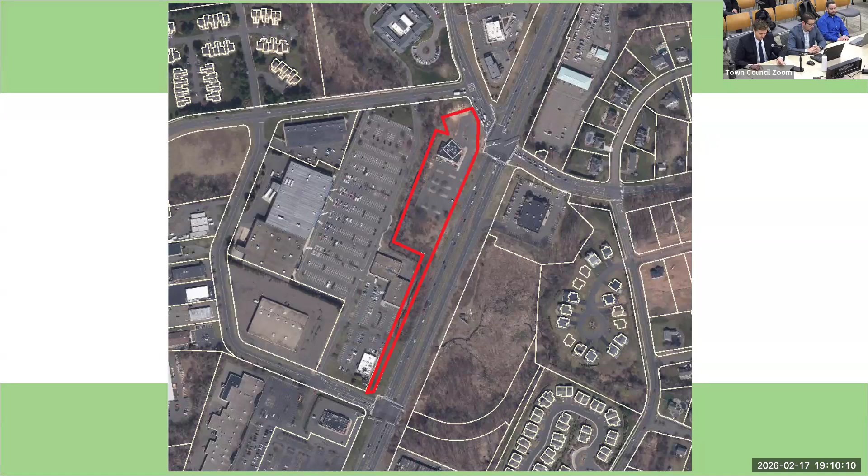The parking area will be landscaped and fitted with a comprehensive stormwater detention system. As you will hear, the proposed construction will not result in any loss of wetlands or the watercourse. There will be no direct impact and no impact to any existing function of either. So with that, I'd like to defer to Mr. Gustafson, who will discuss a little bit about the existing conditions of the site.

Thank you. For the record, my name is Matthew Gustafson, registered soil scientist with All Points Technology. I've been working in the state performing wetland evaluations, soil assessments, and compliance construction monitoring for over 15 years.

We've generally set up the general framework and location of the site. I'll go into a little bit more detail. Our singular wetland feature located on the property generally forms the western extents of the subject property. It approximates about 0.1 acres of wetlands along that western boundary, which consists of a well-incised perennial watercourse with a sandy, mucky bottom—well-incised, located within steep embankments along both edges.

Portions of it are well-armored with an existing retaining wall located along the southwestern banks of the resource. As is typical with watercourses in heavily urbanized areas, there is extensive existing disturbance located within and adjacent to the resource, illustrated by high amounts of litter, debris, and also large amounts of stormwater inputs from the surrounding developments, thus impacting the various functions of this wetland.

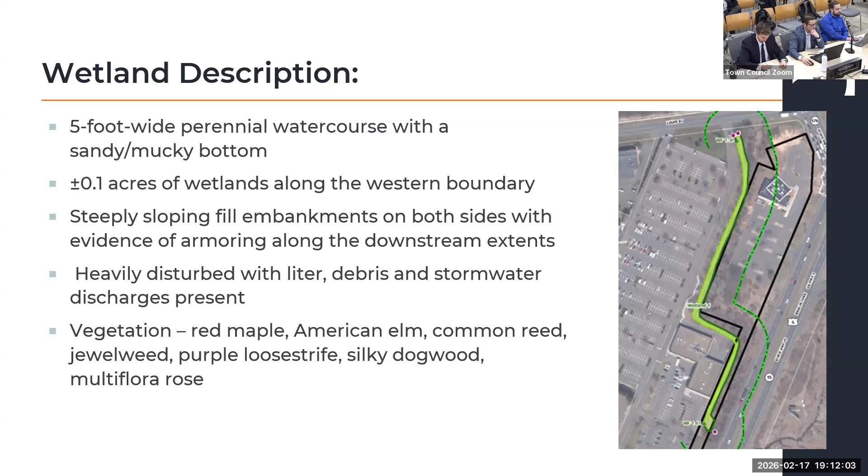The original investigation was performed on August 29th, 2023 by myself, and subsequently, as already discussed, this recent application reevaluated and found it to be substantially consistent with that original delineation performed in 2023.

To discuss the functions and values provided by this wetland, the function and value assessment is consistent with the Army Corps of Engineers guidance documents on assessing those functions and values provided by wetlands. In this case, all the functions and values were assessed, and it was generally found that this wetland solely supports the groundwater discharge and recharge function, as discussed prior.

This wetland is largely a connectivity conveyance feature between wetlands to the north and to the southeast, so it does not really serve a groundwater recharge function—it is purely a groundwater discharge function. But again, because of the high levels of disturbance and highly urbanized nature of the landscape, this function was not found to be supported at a significant level, and therefore was not deemed to be considered at a principal level; rather, it was limited to a secondary level.

Going through some of the integrity of the wetland in the upland review area: this resource is located within a highly urbanized landscape, surrounded by development on mostly all four sides, and heavily fragmented by Lewis Street to the north and Berlin Turnpike to the southeast. Again, there are high amounts of both human influence as well as stormwater impacts resulting from the surrounding landscapes directly discharging, resulting in thermal pollution as well as the physical pollutants associated with this typical type of landscape position.

To briefly discuss the upland review area that borders this wetland. Again, much of that upland review area consists of two different ecotones, one being the developed landscapes we've already discussed ad nauseum. The second being some of the transitional edge forested habitat that exists both at the top of slope and in the transitional slopes down to the wetland.

Species are generally dominated by mature Norway maple, box elder, green ash. There are some other species found as co-dominant or suppressed species within these transitional areas as they get closer to the wetlands. The understory is dominated by...

...a whole host of invasive shrub species, including Asiatic bittersweet, multiflora rose, honeysuckle, staghorn sumac being one of the lone native species that comprise some of the edges, and rubus, your raspberry and blackberry, that form along some of the edges.

Again, similar to the wetland discussion we've just gone through, the ability for this upland review area to provide significant value and function to the wetland is highly compromised due to the urbanized landscape fragmentation of this particular block of wetlands and edge habitat, as well as the high amounts of invasives found in the understory, and the high amounts of historic fill and activity associated with both this and the surrounding developments.

Excuse me, but it seems I'm not hearing what the proceedings are. I don't know if everyone else online is having the same issue. We've lost audio, and they can't hear us.

Mr. Chairman, can you hear us? At about what point in the presentation? We're still not hearing. We can't.

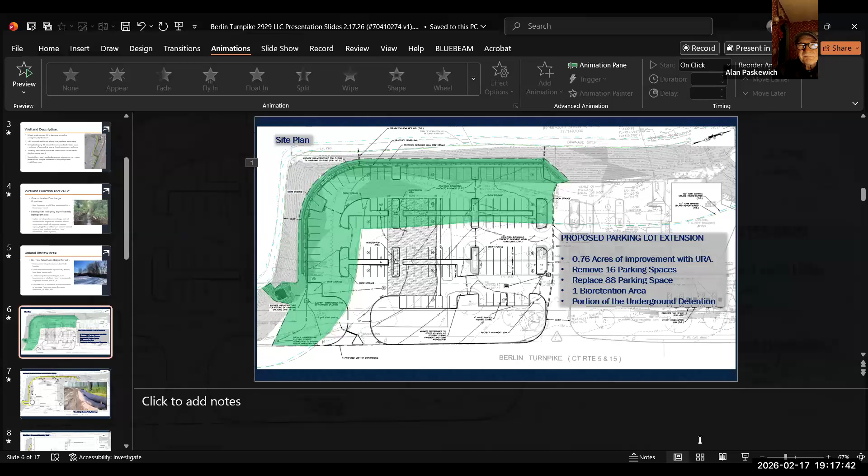There's an echo in your audio. Someone's speaker is too close to their microphone, too close to the speaker.

I'm not hearing anything. Are you guys hearing anything? No, no. Oh shit, no, we're not hearing anything either. I think they realize they're having some audio issues because of the feedback they were getting.

Can you hear us now? Yes. Is it still echoing? Yes, it is, there's still an echo.

But it should have been turned off. It's hard to get to from here.

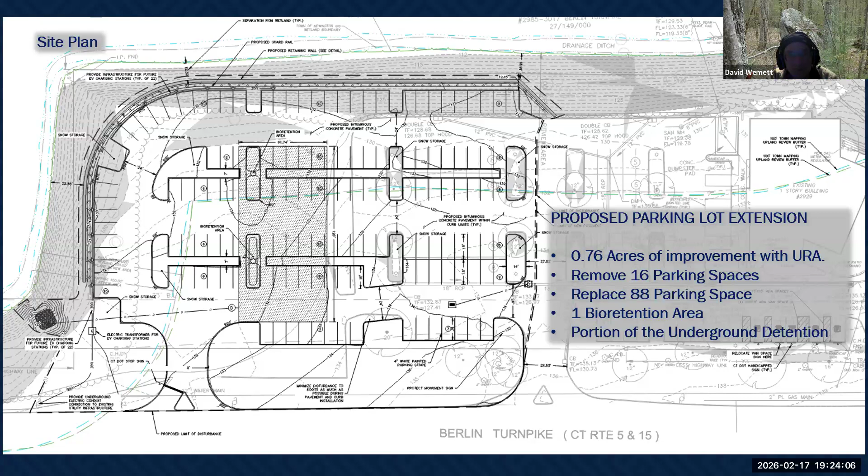That's peculiar. Yeah, I don't know why they always seem to go with the webinar instead of a regular meeting.

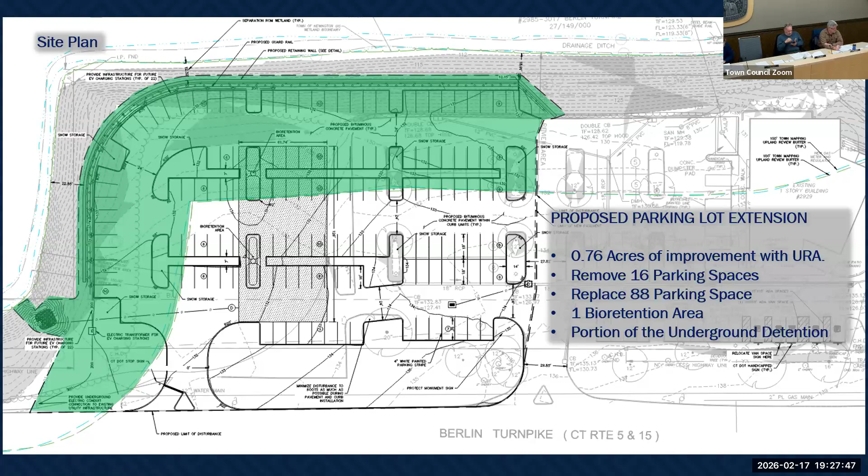The green area identified here is the improvements located within the upland review area associated with this development, which includes the removal of 16 existing parking spaces that are part of the existing site development. They will ultimately be replaced in kind with additional spaces to include a total replacement of 88 parking spaces located within the upland review area, again associated with this green area.

There is one of our two bioretention areas identified here. If you can all see my cursor, this is one of our stormwater treatment water quality areas, as well as a portion of the underground detention, which is this dark gray rectangle. I'm pointing it out with my cursor here, as well as the discharge associated with the stormwater detention area, which is on the left side of your screen, the southern portion of the site.

I'd like to speak a little more in detail about the erosion and sedimentation control, especially in relation to how it associates with the adjacent wetland areas. So the dark line you see identified here, which I'm going to highlight with this yellow line, is being proposed as a wood chip erosion tube, also known in the industry as a coir log.

This is a much more substantial form of erosion control. The standard erosion control typical to this type of project is either erosion control silt fence or a straw wattle, which is much smaller. This product is actually approximately 1 foot in diameter. It will essentially be blown-in wood chip mulch inside a large tube-like sock. It has a much higher level of filtration associated with contaminants or any sediment discharges.

Once the entire product gets wet after the first rain event, it creates essentially—it is not an impermeable barrier, but it is much more substantial and much more able to withstand construction erosional forces associated with development such as this. This photo is actually a rather accurate representation of a potential project such as this, showing the disturbed area to the left-hand side with the erosion tubes set and staked down, and then the contained wetland area, in our case, approximately 15 feet away from this boundary.

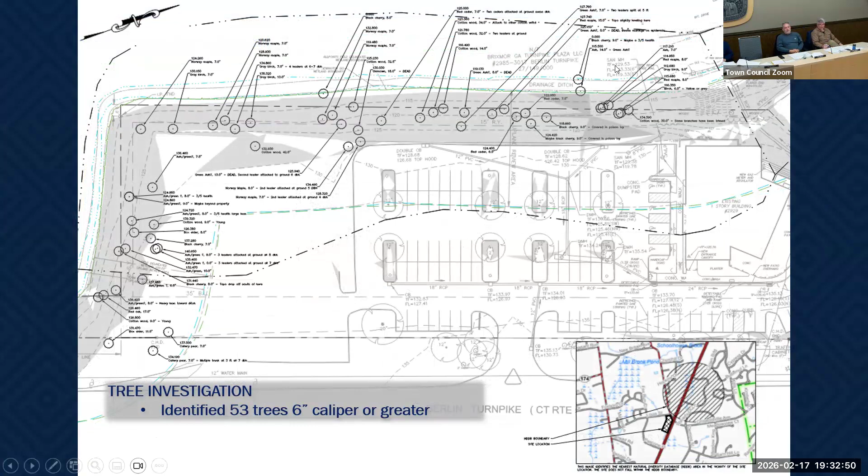I would like to note that as part of the project, we did do a tree investigation. There were 53 trees identified that are 6 inches caliper or greater within the general vicinity of the project and also within the upland review area. Of those 53 trees, 25 will be removed to accommodate the development. However, we are replacing 12 of those as part of the proposed development in the landscaped area.

As far as stormwater associated with the design, we are using a more forward-thinking and emerging technology for this. We are not using the standard catch basin and piping and detention system as typical. The blue areas you see identified here are erosion control rain gardens, and our water quality rain gardens, identified here by the graphic on the right-hand side. So instead of having the flow essentially discharge into a catch basin and a pipe, it basically enters this smaller structure and discharges to this landscaped area, which is a treatment structure designed to treat all of the contaminants that exit off of the vehicles and onto the parking area, and has proven to effectively remove substantially more of the pollutants that would typically get into a wetland system associated with a standard drainage design.

The larger rectangular area here is the detention pond and detention basin, which is an underground containment area located beneath the parking, and this will reduce the impervious pavement. The flow generated by the increased impervious essentially gets reduced down to smaller than the existing condition. So essentially the flow discharged from this development is less than what is currently being discharged from the site under the existing condition.

Landscaping associated with the development, you can see the additional trees that have been identified to replace a portion of those that have been removed. There's also substantial additional plantings provided throughout all of the interior landscaped areas. There are grass portions of the interior parking that will utilize a wildflower mix, so it's a low mow mix. They don't have to be maintained nearly as much as a standard type of lawn.

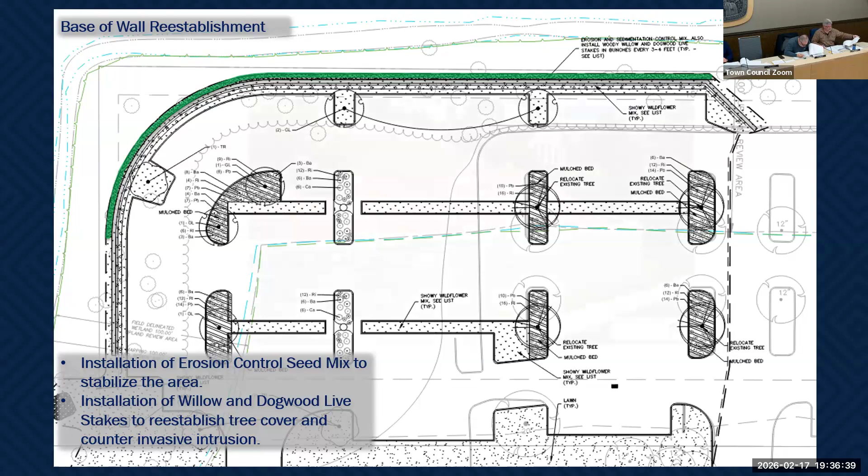And then the darker area you see along the top here is actually the portion of the wall in between the wall development and the adjacent wetland, upslope of the wetland. I added this photo as a clarification to show that the wall install's impact area in front of the wetland face is essentially very small, no more than 3 to 5 feet.

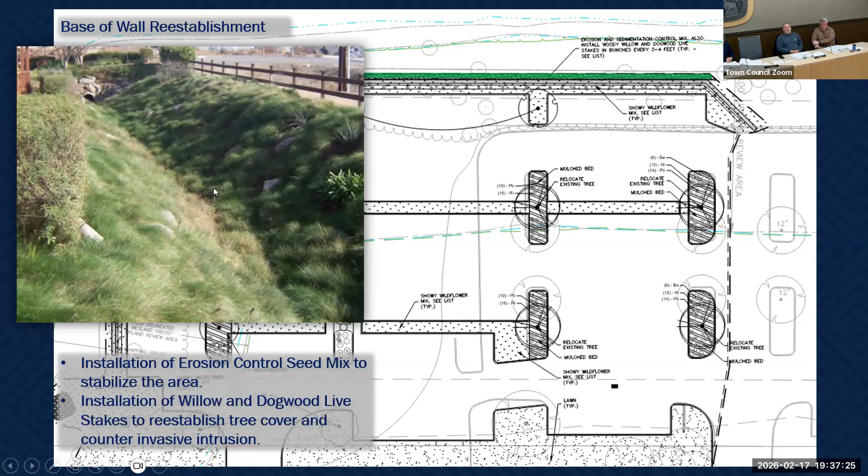So as soon as the first layer of stones for the wall gets installed, they have the ability to stabilize the area. They can stabilize the area immediately with temporary measures, but after the first layer of stones are installed, they will immediately install erosion control seed mix, which looks like this once germinated, as a stabilization measure to ensure there will be no discharge of sediment associated with the wall construction into the wetland area. Then to revitalize the area after the initial stabilization, we are proposing the installation of willow and dogwood live stakes to reestablish the tree cover and to counter the invasive intrusion.

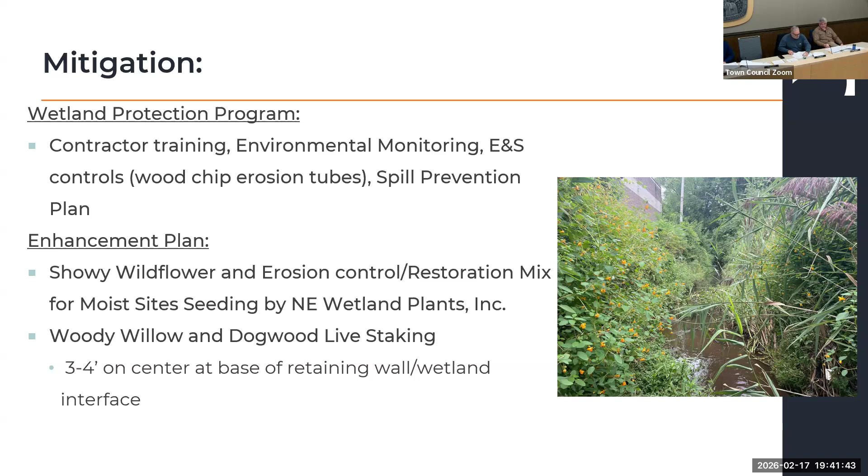Many of these species naturally propagate, especially in the case of dogwood and willow. One of their natural propagation methods is in situations like this where they'll break off a host tree, float down a stream or river, lodge in the embankment, and because of their rhizomatous growth, they'll be able to regrow. So we're essentially simulating that natural pathway and utilizing it for our beneficial purposes of establishing not only rapid stabilization, but also providing some enhancement to the wildlife function of this resource and a more natural ecotone transition at the base of the wall.

We can go on to the next slide.

To reiterate, one of the most significant and important aspects of any project, and in particular this project, is avoidance of direct wetland impacts, in which this project has been successful in entirely avoiding direct wetland impacts. Because of the program needs of the development plan, impacts to the upland review area are unavoidable while maintaining those programmatic needs. Therefore, we are proposing impacts to the upland review area.

Of significance, of course, is how these impacts may or may not affect the existing functions and values of the wetland. Again, we've gone through that this wetland provides very limited functions and values because of its setting and heavily impacted nature. So in that regard, the proposed project is not anticipated to result in any significant negative impact to any of those functions, and all of the functions it currently provides will still be maintained after development. In the case of some stormwater renovations and enhancements, some of those functions may actually be enhanced, particularly wildlife functions and stabilization functions, by our proposed renovations and mitigation plan.

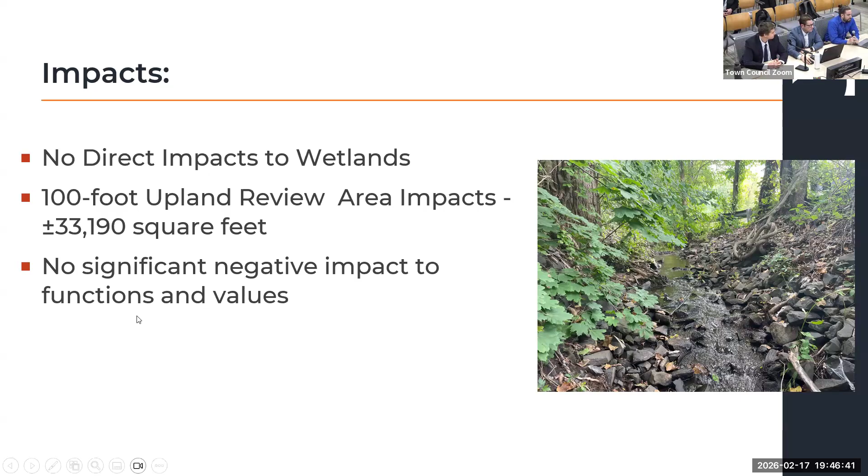Thank you. I do not believe we went through a discussion of alternatives in our report. The wetland assessment report was purely an assessment of the functions and values and existing characteristics of the wetland.

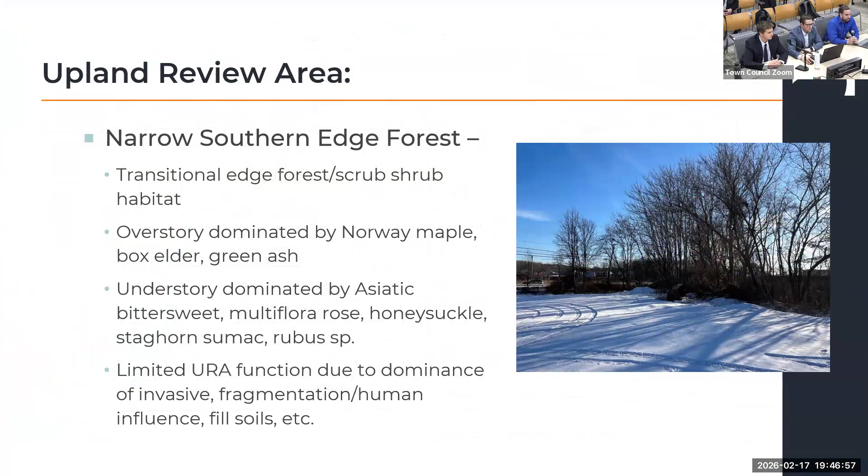Right, but what I'm asking again for is a description of the loss that's going to occur to the upland review area. So again, I think we've detailed the actual physical loss, the square footage loss of that upland review area. Again, in the perspective of loss to the wetland resource, it is our opinion that based on the currently provided functions and values of that wetland, there will not be any significant loss of function or value to the wetland due to the impacts to the upland review area.

Okay, so if you did provide that, can you point it out to me? Where is that loss pointed out? Where's the inventory of what's being lost?

Andrew Moran, for the record, in our review letter, we've outlined the square footage of disturbance within the upland review area. So I think when Mr. Gustafson is saying that is where we're affecting the upland review area, it's the square footage of the area within the upland review area that we're disturbing.

Can you repeat that number? 33,190 square feet. Thank you. A little over 3/4 of an acre.

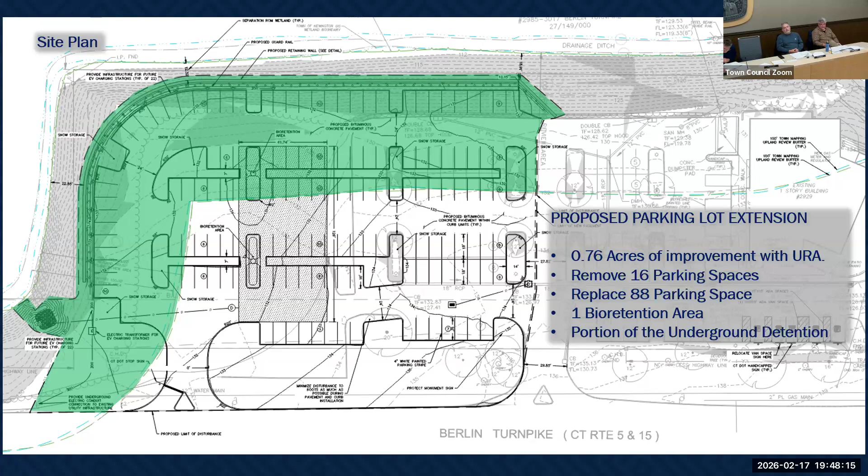The 33,190 is square footage? Okay. And there's a retaining wall that's going to be built, and I'm looking at C-1.0, and there's a whole inventory of trees here. Those are proposed to be removed?

For the record, Frank Vaca. The trees proposed to be removed are identified on the erosion control plan via X's on the plan. I also have it up on the screen right now. The trees that were identified on the plan number 53, and the ones identified to be removed are marked via the X's that the commissioner just mentioned.

Okay, so when you came to us in December, under inland wetlands application IW 25-18, we asked you about the inventory of trees regarding cottonwoods, whether there were eastern cottonwoods or the presence of any swamp cottonwood, which is a known endangered protected species. At that time, you seemed unable to identify the difference, or were unaware of it. I understand you're a soil scientist and great at identifying soil types, but as far as environmental impact, I'm a little concerned you may not have the right qualifications.

Mr. Chairman, if I may. I think it's important, and by the way I did review the meeting from last time. I think it's important when discussing wildlife impacts that we go back to the general statutes and what they say about the purview of the Wetlands Commission, which is specifically to examine the functions of the wetlands and watercourses to provide wildlife habitat.

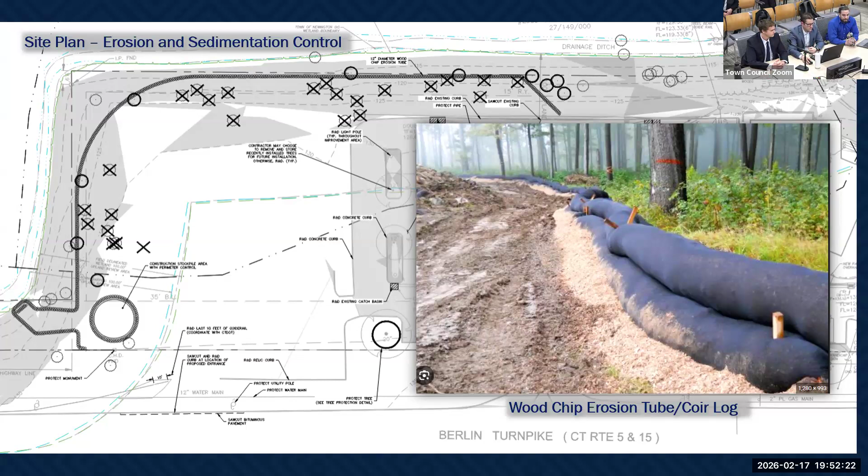If I may, Matt Gustafson. While I've mentioned I'm a registered soil scientist, I'm also a trained forester and a wetland scientist. Wetlands in the state are purely defined based on soils, while that is statutory in the state. At a federal level, they're defined based on soils, vegetation, and hydrology. As such, I'm trained and versed in identifying vegetation. To your point on the cottonwood, I took that note from the previous meeting and looked up the differences based on the assessment of the cottonwoods from my original assessment, as well as the notes I took that day and subsequent investigations. Based on the fact that a review of the natural diversity database does not have any known records of any listed plants or animals in the vicinity, at this time I'm not aware of any of the listed cottonwoods you're referencing being located on the site.

Right. I still want a third-party review, just to make sure we're crossing all the T's and dotting the I's. I don't want anything to slip by on this one.

Commissioner Bashant, on the prior two times you were here, he asked how much fill you were going to put in for that retaining wall, and you were unable to answer then. How much fill is going in with that retaining wall?

Frank Vaca with BAC Group, the civil engineer. I did investigate that specific item, and for the project in total, there's a total of 2,600 cubic yards of material being added, from the existing condition as identified to the proposed condition. But that is the entire project, not just the upland review area.

2,600 cubic yards. I said it would be in the thousands. Okay, so that's fill. It's a significant amount of fill. Yeah. Is there any soil removal?

Yeah, but what specific part of it, in the inventory that hasn't been presented, are you asking for? The part that shows the upland review area and the statements that have been made that it's going to be completely deforested in order to build the project. Section 6.5 of our regulations protects a vegetated buffer area. It recognizes the importance. Hasn't this been brought up in former meetings with this commission on this particular? Yeah, it was, and that was one of the concerns for the commission not voting to approve the applicant originally.

If I may, swamp cottonwood is a listed threatened species in the state under the Connecticut Rare Species Protection Natural Diversity Database. Again, how the Natural Diversity Database works in the state is they have records for known populations. In this case, we queried that database, and obviously no listings were found to occur within the premises of the site associated with this wetland resource.

Using known databases, as well as our investigation. The commission is just trying to assist in answering the question, but the commission is aware that the databases aren't accurate. They're only as accurate as the data that goes into them. That data is typically reported by the public, and if the public doesn't report that a particular species is seen in a particular area, then the database doesn't get updated. That is correct, especially the swamp cottonwood, which we didn't know existed on our own Cedar Mountain and was discovered there. Right, so there is a history of it. That's why I think you're bringing it up.

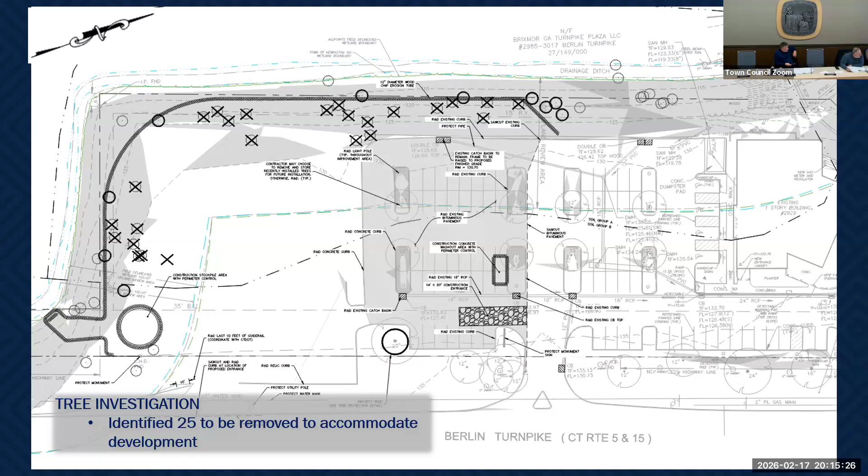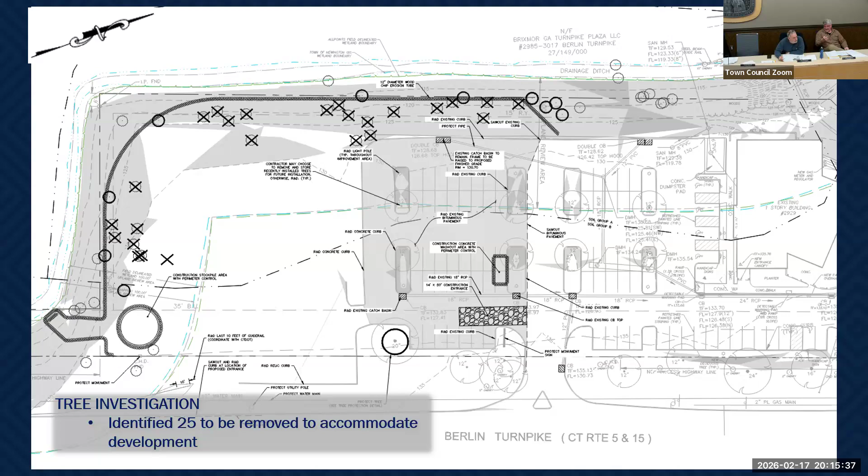I was there today - it is plowed. And they are using it for parking? I was there on the 24th, just a couple Saturdays ago, and let me tell you, not only was that entire area packed, there were cars pretty much trying to park on the Berlin Turnpike. To me it was a very big public safety hazard at this point. There were no cars when I was there today, and not a lot of traffic on the gravel. I glance over every time I go by. There's a difference between a Saturday and a Tuesday night - Saturday night I'm sure the employee parking down at Price Chopper was packed, but it was insane, it took me 20 minutes to find a parking spot.

If I may just redirect, I think we're getting into more of a zoning compliance issue. If there's some sort of zoning issue, that would be the purview of Mr. Dixon. It's not zoning, it's the necessity for the use.

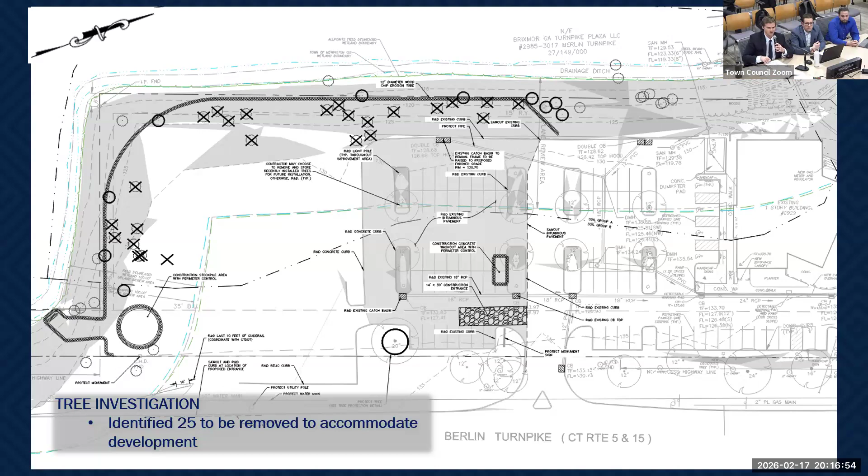Can I go with my question? Go ahead. You originally said there were changes to the northwest corner - did you mean the northeast or the southwest? Looking at it from the southwest, apologies, yes, southwest. What changes were those? Correct me if I'm wrong, Mr. Vecca, but the original design had more of a pointed corner, and some spots were eliminated. To clarify for the record, pointing to the screen, in the first iteration that came to the commission there was an angle here - the curve that is identified... I'm sorry, I'm on the wrong plan here.

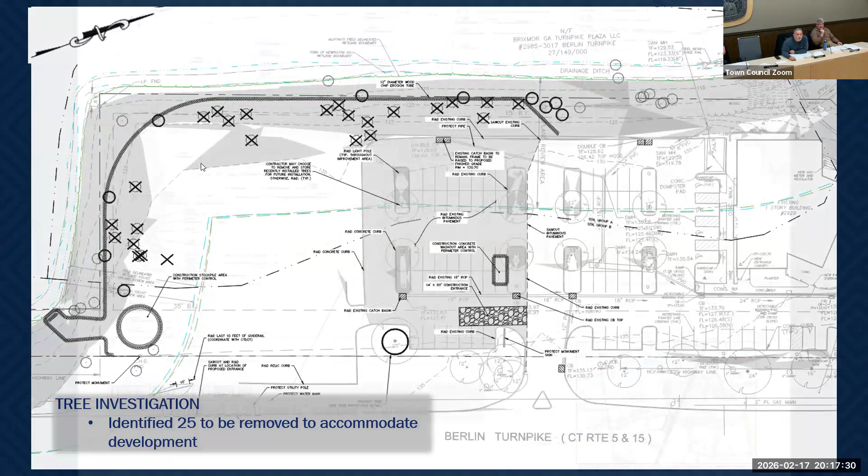So the curve that is currently in front of you as part of this application was originally a straight line to an angle and then another angle, and there was substantially... This is the same that we saw last time. Yes, that is correct. This is the same plan that was not approved previously.

So there's no changes. If I can keep going, I was there today. Have any of you been there with the winter conditions? I've not seen it recently.

So they're pushing the snow over the guardrail the entire length of the property. That's going to continue to happen because this little spot you have here for snow storage is so small. If you look there now, you can see the snow is going over the guardrail the entire way, and that guardrail is about 15 feet from where your new guardrail is going to be.

There's also a lot of garbage. I think it was probably picked up with a loader, maybe unintentionally, and dumped over the guardrail all the way down the hill. A lot of it's just plowed up to the guardrail and pushed over, but there's one area closer to the building that looks like it was done with a loader, picked up and dumped well over the embankment, with milk cartons and other newly deposited trash. It was probably unintentional.

But for that reason, there's no way that you're going to avoid putting snow over that embankment. These little spots you have for snow storage are the space of 2 cars, and that's not going to do anything with a large snowstorm.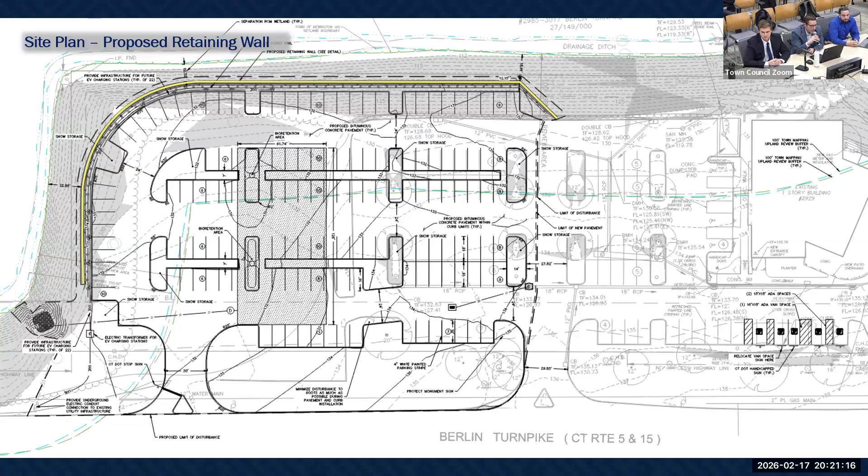I have spoken to the owner of the site. He does have a number of other sites in town where he would have the ability to remove larger portions of snow in the event of a storm of this magnitude. So we've already discussed potential situations, since there seem to be larger and larger events of this magnitude to handle. We do have a potential solution to that. What is identified on the plan is an approximate size given a standard snowstorm in Connecticut.

I just don't think anyone's going to haul snow off site when you have an embankment to dump it over, and that's what's happening now. So there's no way to tell how that would ever pan out.

But, Commissioner Bashan, we're not here to make assumptions—we have to remind you of that. I'm not making assumptions. Commissioner Paskowitz, please do not interrupt the commissioner when he's speaking. You'll get your turn. That's not an assumption, it's an observation. Interrupting without asking—would you mute him, please, before... as well.

Go ahead, John. Well, I was just saying that wasn't an assumption, that's my observation, so it's tempting. I would probably do the same thing. I'm a contractor myself, so when there's a hole, people tend to fill it.

Anyway, you mentioned a couple times that there's no loss of the wetland. So technically there's no loss of wetland, but there's a major loss of the regulated area. I think Mr. Morris put it in the simplest and most elegant way, the lowest common denominator, that when you remove the buffer, you are affecting the wetland. So I'm still where I was 2 applications ago, 1 application ago. It needs to be pulled back, in my opinion.

You're gonna lose 20-something spaces. If you kept it with the curb in the existing parking lot, you lose 1 row of parking, so it's like 25 spots or something. That's just an opinion, we can't tell you what to do, but I would be much more comfortable seeing that than what I'm seeing now.

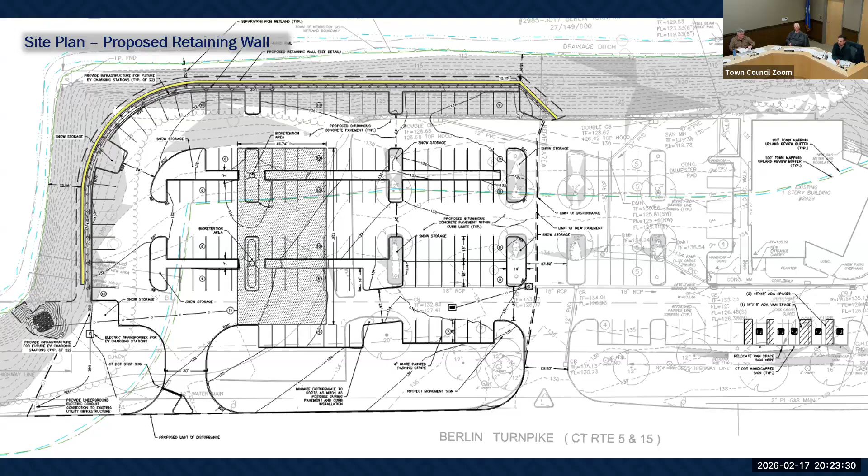Just something I was wondering, with a drainage system like this that you're planning on installing, the whole stormwater retention, all that, what is the anticipated... have there been any studies on the water quality coming out there? Any contaminants that make it through, turbidity, things like that? Especially compared to just a regular outfall that you guys have out there now, generally dumping into that.

A focal point of biofiltration is a proprietary system. Personally, in my opinion, it's one of the best systems out there. There have been countless collegiate studies. There's one study in particular called NJCAT, a New Jersey-based study specific to the turbidity and sedimentation that comes out of a system associated with water quality treatment. That system is the most stringent and most widely recognizable, typically used mostly for hydrodynamic separators.

A hydrodynamic separator is essentially the non-green version of this design. Basically you have a catch basin with pipes and a detention system, and to treat the water quality, you swirl the water around inside this chamber and it collects a lot of the sediment. The sediment filters out, you collect the oils, it collects the trash, and so on. So instead of using that type of system and achieving an 80% TSS removal, total suspended solids removal, you're using this product instead. Instead of swirling it around, your initial flush comes off through this pretreatment structure, which collects all of the trash and the first portions of the sediment.

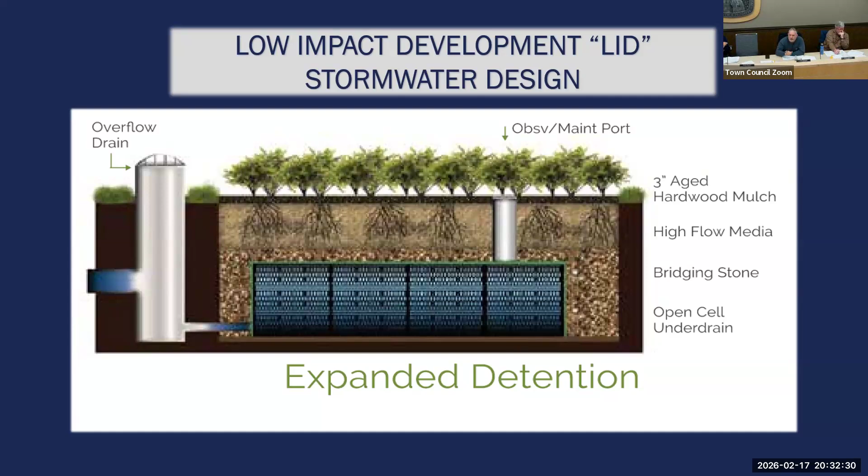We absolutely did not say that. Can I just get your answer again? Did you ever say how close the retaining wall was at the closest point to the property line? I may have interrupted you or didn't hear it. You lost it. Looks like it's within a couple feet at the closest.

The property line is on this plan that you're looking at here, the gray line that you see in this area. I think the closest that I would have the limit of work identified at 5 feet, which is the dashed line that you see here. I don't have the exact measurement on hand, but I believe at the closest we are probably within 8 to 9 feet of the property line. But I would have to get the exact dimension on that.

Any other questions, Commissioner Bouchon? No. Commissioners online, any questions for the applicant? Well, we have them.

Mr. Chairman, if I may. Commissioner Siddell, thank you. I got a few questions for Mr. Vaca and then for Mr. Gustafson. Mr. Vaca, can you summarize the improvements to this plan? You talked about the radius there in the northwest corner of the property. Can you summarize in a nutshell the improvements since the plan we saw back in December? Can you go over those one more time?

For the record, the plan that was submitted in December is the same plan that is submitted today. We have added there was a request, or I should say a recommendation, from the town engineer that a turbidity curtain get added in the wetland portion prior to it exiting the property, and we have added the turbidity curtain into the erosion sedimentation control plan.

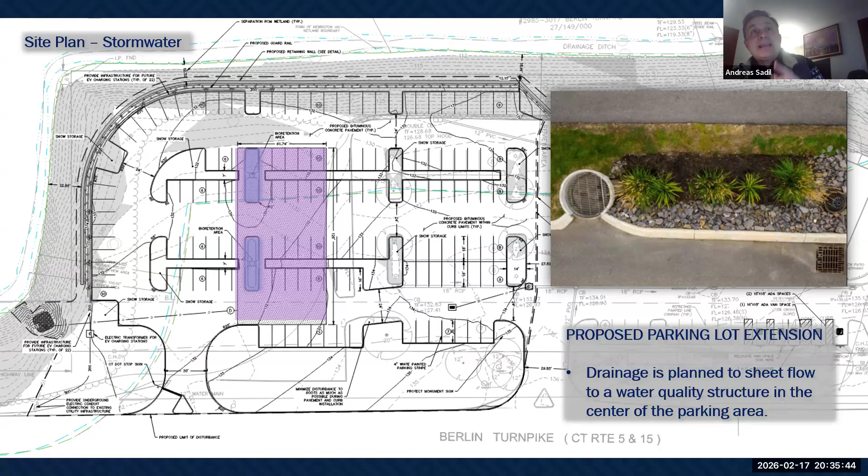Relative to the wall itself, on the parking lot side, how high is that wall going to be? The highest point of the wall is 12 feet. On the parking lot side, it's only going to be approximately 6 inches. Okay, but when I look at the wetland side, it's going to be variable, up to 12, a gradual incline or decline, right? That is correct.

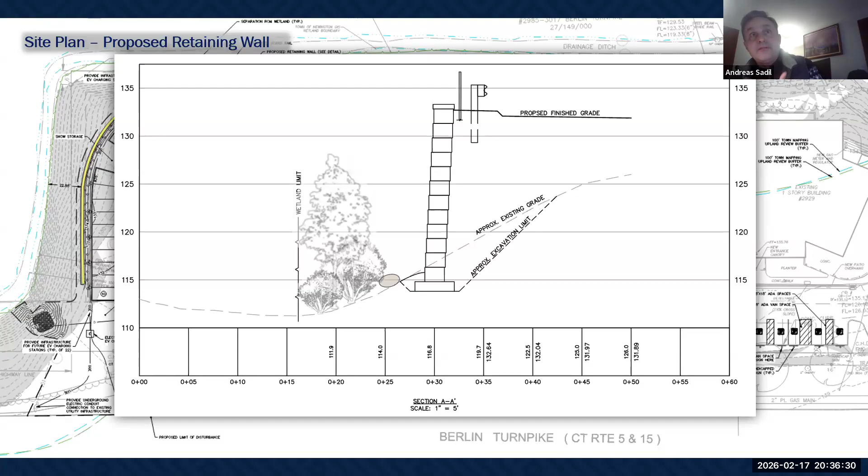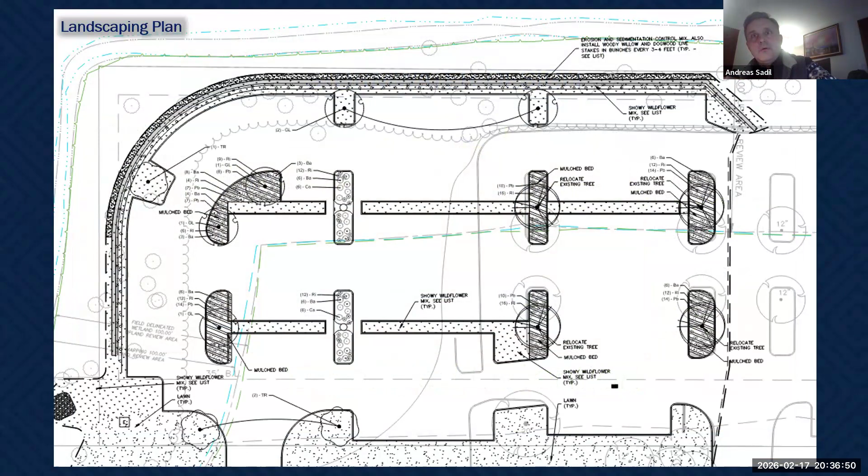You mentioned you're taking away the trees, but is there a planting plan to replace besides the live staking? Are there any other tree plantings planned, and if so, are they on a plan the commission can review? I see the one with X-ing out, but I'm talking about the buffer, not the parking lot. In between the base of the wall and the edge of the wetland, are there going to be just live stakings there, or will there be some other plantings of trees?

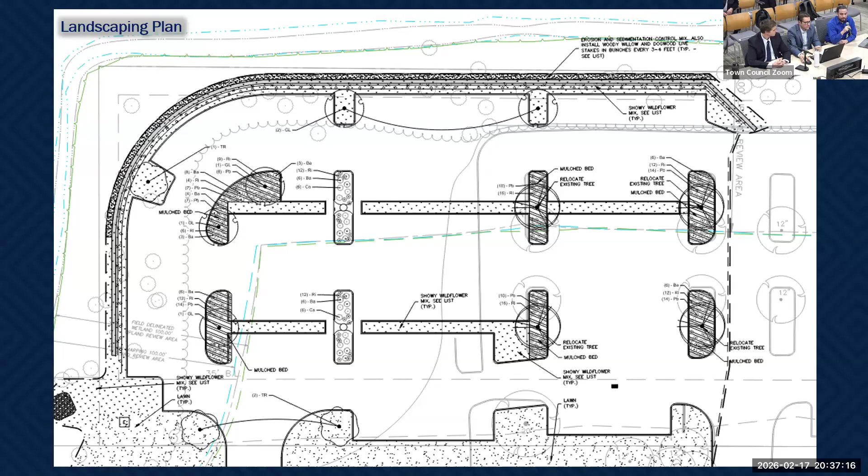I'm going to hand this over to Mr. Gustafson. To simply answer the question, yeah, that is correct—the sole plantings that are proposed are the live stakings. We went through this a bit last time, but I'll reiterate it for the record: the live stakings, while they start as fairly small, 3 to 5 foot stakes, these species at maturity can grow upwards of 15 to 18 feet.

And in this location, it would be expected to attain close to that maturity height. So these are not like to kind of go to... the impetus to your question on, we're cutting trees, what are we replacing them with? In this case, the shrubs, while not full grown trees, which would be largely unsuitable for this location because of the proximity to the wall, they are, the replacement or mitigation in the form of live staking, are far more substantial than a standard shrub that may not attain the heights I previously mentioned.

Well, how long could this live stake get established? You put it in the ground, it needs time to assess itself, get into the ground. How long does that take before it becomes viable? You know what I'm saying?

Yep. Matt Gustafson, for the record, one of the benefits of these live stakings is they very quickly establish. They certainly won't attain their mature height immediately, but they will immediately start to sprout at their base to establish that stabilization on the root of the soil surface. These species are adapted to kind of grow in these situations, adapted to riparian systems which are naturally in flux due to flooding regimes, disturbance of the banks, etc. So these things will very quickly establish and grow. In past projects, under ideal circumstances, you can see them reach maturity in 3 to 8 years, somewhere in that range, more than likely.

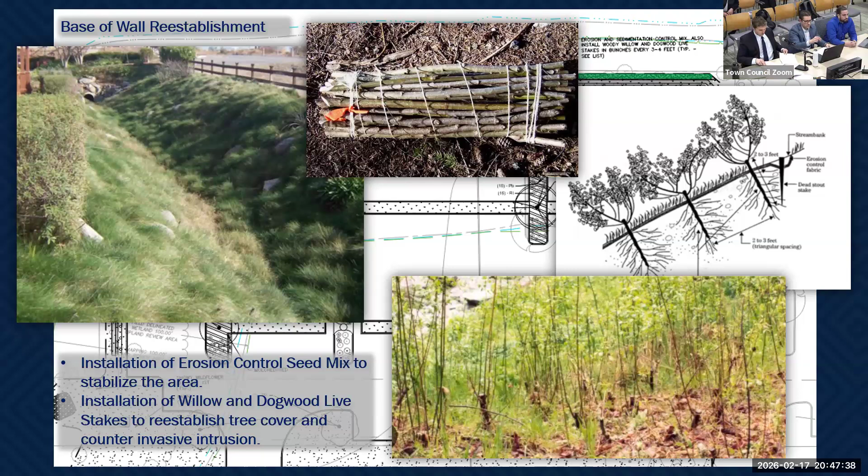Typically, public hearing is required if there's significant impact. I've seen in the engineer's report, we're going to have to clear all the trees from the buffer area. Substantial soil disturbance on the hillside. Concerns about the E&S measures.

Disturbance area is 33,000 square feet plus, with 2,600 cubic yards of fill. Everything, in my opinion, reads as significant.

I'll let the other commissioners make comment. Commissioner Bashan: I agree with everything you just said, but also, since this is the third time we're hearing the same application, I wonder if there would really be any public interest, since there's no residential housing nearby. But I do agree with what you said. Thank you.

Any other commissioners? Is this in the regs specifically for the wetland, or for the upland review area? Significant impact, I believe it's both, because disturbances in the upland review area have the potential. If it's both, then we should have a hearing. I would agree with you, just to be on the safe side.

All right, so can I get a motion that a public hearing is required for this application, IW 26-2? I'll make the motion that a public hearing is required for IW 26-2. Can I get a second? Second, from Commissioner Anderson.